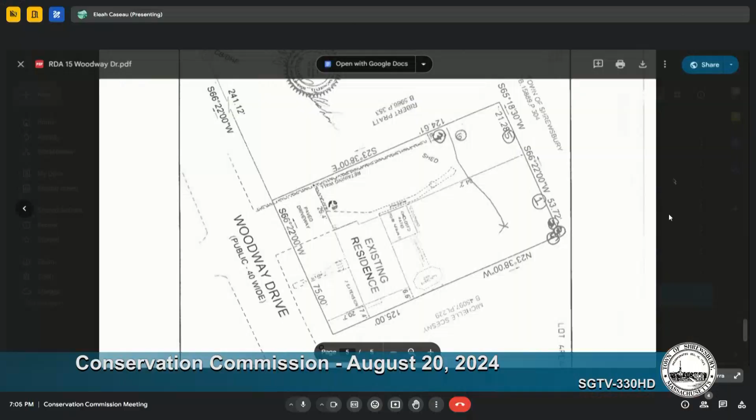Is that the one you'd like? Okay, so the tree furthest to the right - the ground below it is eroding away. So the larger the tree gets, the more weight, it's more likely to come down.

Just hate to see someone get hurt. It's on an embankment - right, it looks like a steep embankment.

And it looks like the embankment hasn't been stabilized with any plants or anything. Well, then that may be why that's such a problem. So if they do come down, you may still want to- Oh, absolutely.

We'll stabilize the embankment. Absolutely, we'll put things back there that are more useful, that is not as scary to fall on someone's house. Okay, very good.

Is that the neighbor's house in the background? I see a light area that looks like it's angled. That's not the neighbor's house, we're talking about the woods. Those woods go to the back of the house. If the neighbor's house is right here, and that tree were to fall, it would fall onto their house.

We're trying to stop someone from getting hurt and at the same time do the right thing. So I agree about the value of leaving some of the trunk for wildlife habitat. Even if the tree is dead, as it decays there will be beetles and things come in, and the wood will soften up and birds will be able to nest in there and eat the beetles. So it's great wildlife habitat.

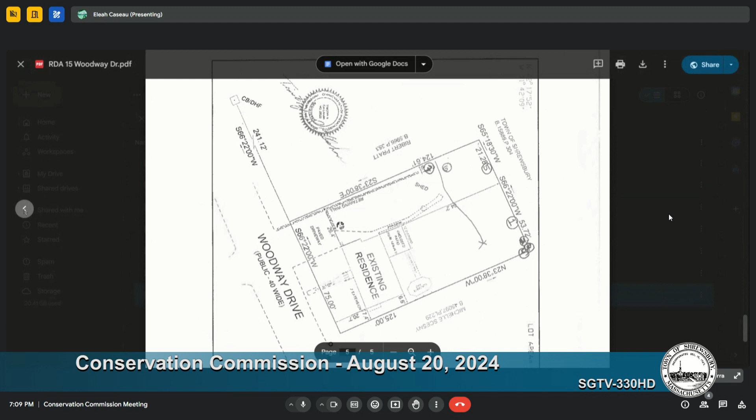And just a word about the tree that's growing like a candy cane - that may have lost limbs or had another tree fall on it, or something that deformed its growth. I think it was the vines that grew up and tied into another tree - there were these strong vines that had grown up and almost pulled it that way, so it grew that way.

Okay, I think it has bittersweet growing up it. Yeah, I was going to guess bittersweet or grape, one or the other.

Yeah, I don't have any problems with this, except for the suggestion of leaving the trunk - be happy if you can leave 8 feet of trunk, that's awesome. And stabilizing the bank afterwards.

Do you have any problem? Well, as you put it out to bid, you'll see companies that have cranes and won't even have to get into your yard, or maybe you'll find companies that can do it by hand - there are people who climb trees these days, as least invasive as possible. Yeah, okay, I'm all set.

Okay, thank you, Chris, no other questions? I don't believe I have any questions. Anybody in the audience have any questions?

Okay, would somebody like to make a motion? Mr. Chairman, I move that we issue a negative determination of applicability for the removal of 7 trees at 15 Woodway Drive, with the condition that at least 8 feet of trunk be left and the bank be stabilized with plantings.

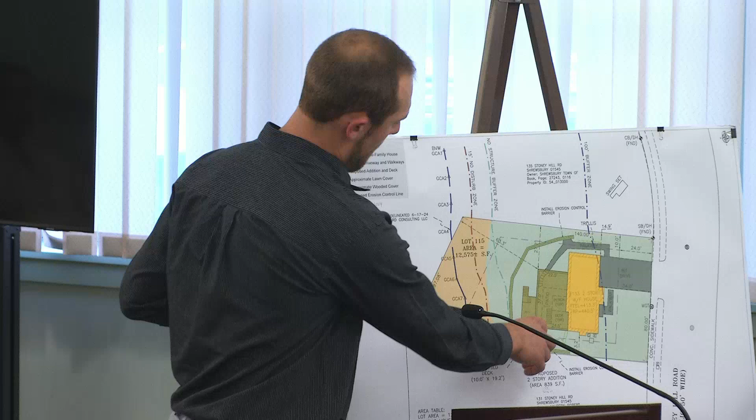So the patio, you can see in the dash line here, the surveyors created a plan that overlaid the existing versus the proposed. This here is an elevated deck, it's going to be on wood pilings with a staircase down. It's underlain by lawn, there's not going to be a new patio in this area. We're removing the patio, so the area under that deck will remain pervious.

Okay, that was going to be my question. Yes, thank you, exactly. Trying to design this in a way that is the least impactful. Okay, thank you very much.

What's the plan for dealing with rainwater on the new addition? Because it's a single-family house, it's exempt from stormwater standards, so in designing this we tried to use our best management practices in decreasing and minimizing where that footprint was created. That's why we used the 470 square foot location of the patio, and felt that a 369 square foot area over existing lawn would be essentially exempt from those standards.

And what's your plan for it? Regardless of whether you're susceptible to the standards or not, what happens to the water that falls on that new addition? Where is it going to go?

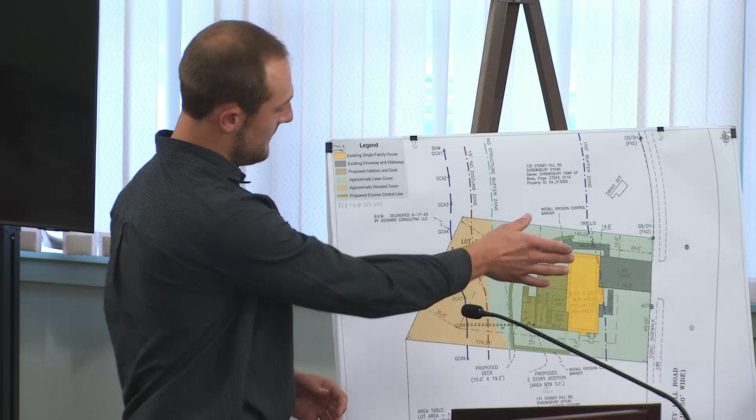The property itself generally pitches towards the rear that you see here. During construction, we had a robust erosion control plan: an 8-inch straw wattle with an entrenched silt fence, double erosion control around the entire rear of the house and existing lawn. Once constructed and stabilized, we have the full area of existing lawn, the grade is not changing, and we maintain our woodland buffer. We feel this project is not creating a significant portion of new runoff, being a very small increase in impervious surfaces, with no grading or redirection of water based on where it currently runs off the property.

Will you have gutters? Yes. Will there be a dry well? There is currently no stormwater management proposed, as they're not required to do so under the act or the bylaw.

I would make a suggestion of putting in either a dry well or a rain garden. Just a suggestion from a member of the Conservation Commission to the homeowners. Thank you.

All set. Chris? I echo Martha's comments. But also, what type of footers will the addition have, are they poured concrete? I didn't hear that mentioned. The engineers have not given us a detail on the exact design yet. I would probably be providing that ahead of construction, or that's something we can absolutely supplement for you guys.

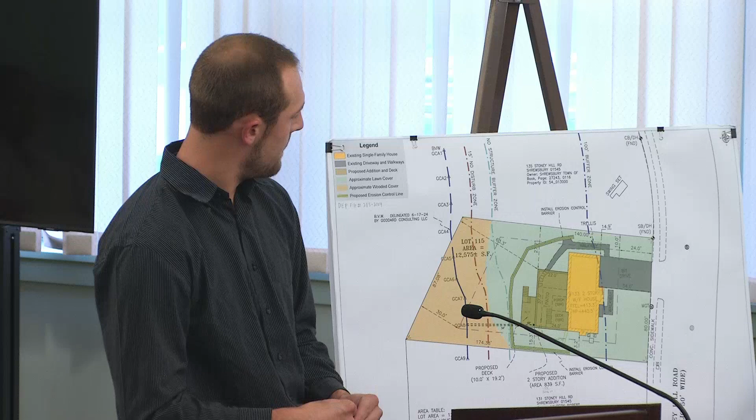And then the same would be true with the deck. Is it going to be just techno blocks, or something under a 6x6 post? That's exactly what they are, underlain by lawn.

Okay, all right, no other questions? Well, I think we really should see what type of foundation you're going to have before we approve this. I think that needs to be part of the submission. By all means, we can supplement with that information. And any extra material generated by that should be removed from the site.

I can have our engineers take a look at that and provide a bit more detail on some of the construction style, and maybe take into consideration Martha's comment about the runoff from the gutters, something to infiltrate it, maybe a small rain garden. Sure, yeah, and the homeowners are here as well, I'm happy to discuss with them after and see what we can come up with.

Okay, Alea, I don't think I have any questions. Anybody in the public have any questions?

All right, so will you ask for a continuance to our next meeting in September? Yes, we will, and we'll provide these responses by that point. Perfect, well thank you very much, we'll see you in September. Great, thank you for your time.

Okay, our next meeting, we have a public hearing regarding the abbreviated notice of intent filed by Srini Ramkumar, 31 Pal Drive, Shrewsbury, for the removal of trees and restoration of plantings at 31 Pal Drive. Sorry if I didn't do a good job with your name.

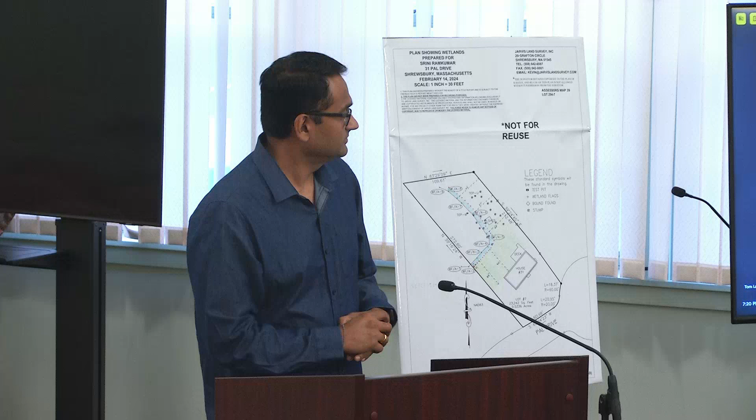I just made a brief presentation of what I am requesting the permit for. In the previous meeting, I was asked to bring a plot plan depicting what the project is, so I brought this. But before I go into this, I wanted to share the overall project at a high level.

In phase one, the plan is to remove the weeds and piled up debris—leaves, sticks, fallen branches—in the backyard, which is making it basically unusable at this moment. I don't plan to do any grading or leveling, just cleaning the piled up debris. I have some pictures to show in the next slides. Full care will be taken that there is no impact to the wetland. We'll be going with licensed landscapers after we get the permit.

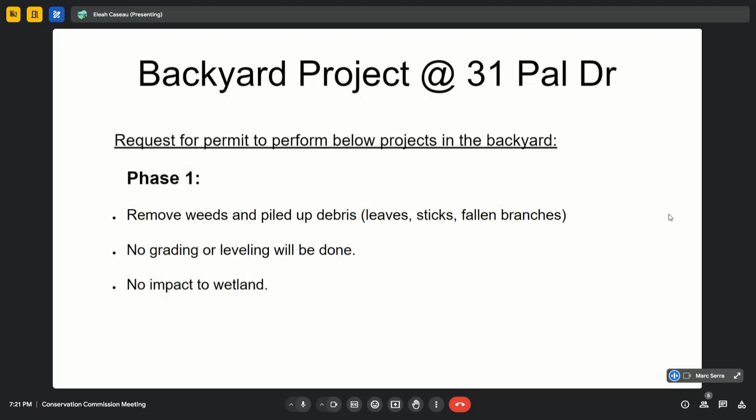So the plan is to take out these things. As you see, there's a natural grading, a natural slope, which I would be leaving untouched—there's no plan to level or make the backyard flat. I only want to take out these things and try to make it into a usable lawn.

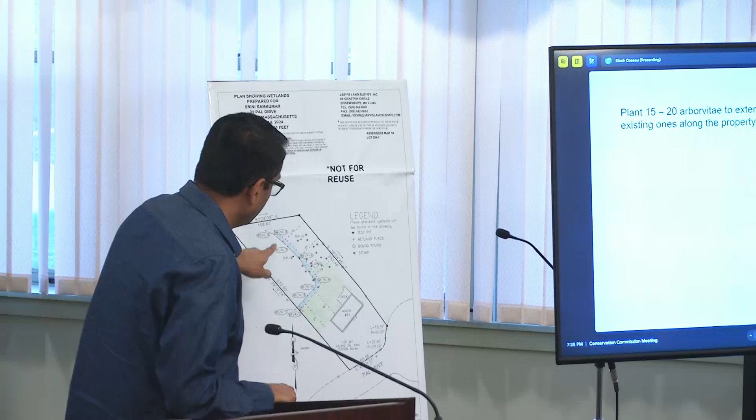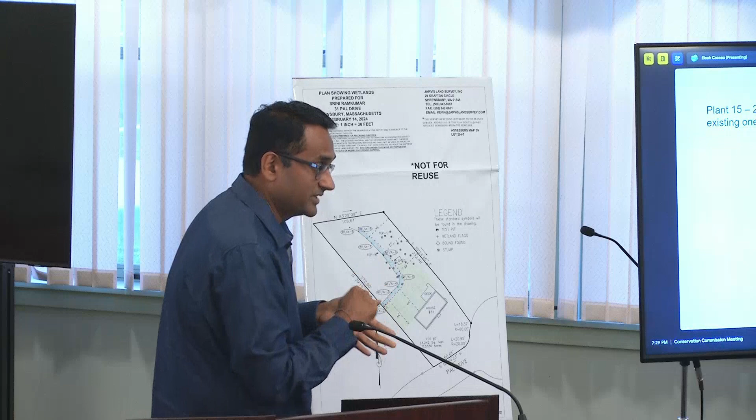And this is the plot plan. This is the house, and this is the current usable part which I highlighted in green. This is the wetland, and I'm requesting permission to plant the arborvitaes along this line. The red dot doesn't signify each arborvitae tree, it's just an indicator to separate out the wetland and the lawn, and I'm requesting that this distance is about 45 feet, 42 feet, 40, 37, 40.

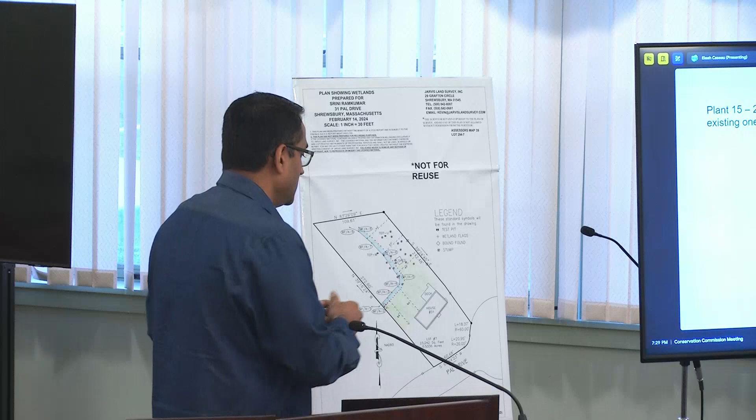So maybe I can, if it's okay, give like a 5 feet buffer between the wetland and the yard, so 5 feet towards my lawn, if I'm allowed to put the arborvitaes. Along this line I would also be planting the supplemental shrubs that would help the wetland. That's the proposal or request that I wanted to put in front of the commission.

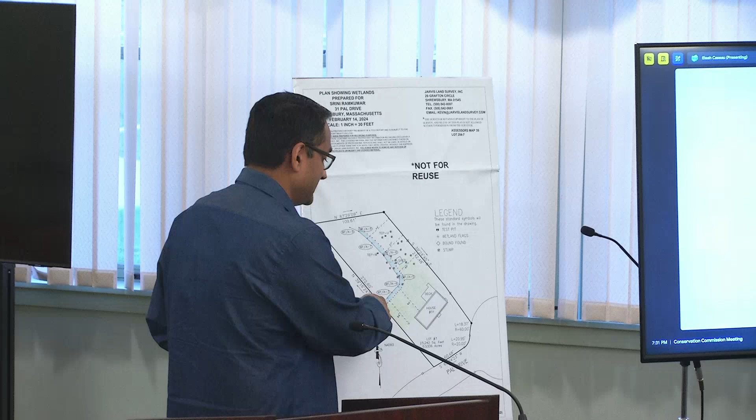I was also asking Ms. Caseau if at every stage of the project I can reach out to her so she can come over, take a look at the project, and stop me immediately if there is some corrective action needed. My concern is if I complete the entire project and then find out that in the very first phase there was some lapse I need to correct. So to avoid that, at every stage, once I complete that phase, before I start the next phase, I would request the commission or Ms. Caseau to come over to review and make sure I am following all the guidelines put forward by the committee.

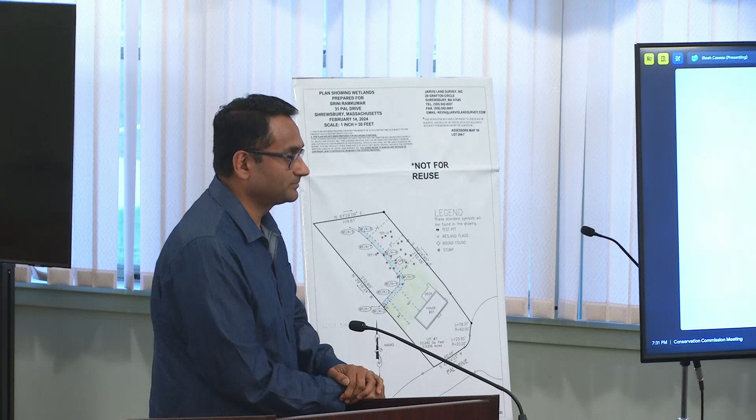So arborvitaes are great because they grow pretty quickly and can make a pretty thick hedge. Barring an ice storm or really heavy snow, they don't need a lot of maintenance as long as they make it through their first year or two. They're also not native plants, so they do provide places where birds can hide, but they provide no food at all.

Would there be an evergreen you could use that would be better than the arborvitae for that location? Cedar? Eastern red cedar or Virginia cedar, I think, is an option. May we talk amongst ourselves? Sure, absolutely. Thank you. This is not something the commission usually does.

But I was also thinking arborvitae, deer love to eat them. I don't know what the deer population is like down around Pal Drive. But they also would visually restrict your backyard view. You wouldn't be able to see out over to the wetlands anymore, so it would make your backyard seem very small.

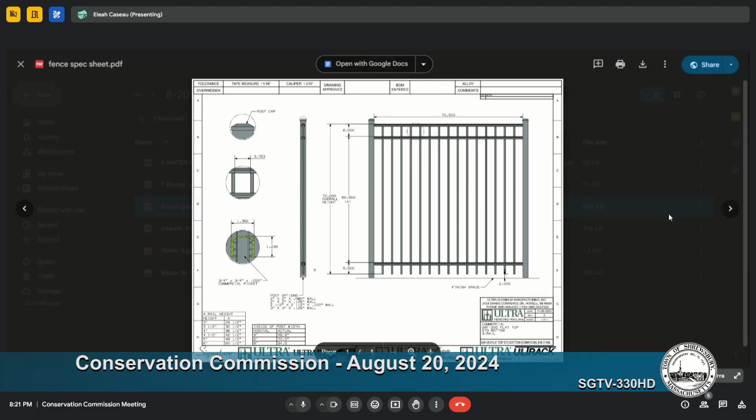So the fence specifications are in the application. I believe they're such that it would be difficult for children, at least our children's ages and their peers. We have a 1st grader and a 3rd grader, as well as older children, but the youngest ones are that age group. So they'd have to put a lot of effort in to get through, but that doesn't mean we'd leave them unsupervised.

The other reason for the fence is that we have dogs. We honestly haven't been able to use our yard at all for the dogs. The neighbors allow their dogs free reign of the yard, but we haven't been able to put our dogs out there because the neighbors have been fairly forward about not wanting our dogs near the waterfront area.

One of our dogs at a previous residence had gotten out a lot, so the town actually asked us to put in a fence when we moved into this house so the dog couldn't escape. So part of the motivation is having a fence in a location the dogs can't get out from easily. If it's set back 5 feet, then the minute the children open the gate, the dogs can go right through into our neighbors' yards.

Neither of our dogs enjoy swimming, although they've only been to the water once. But because of the way the bulkhead is, the gate would only open onto our own dock. It wouldn't keep us from needing to watch our pets, but it would keep them from moving into the neighbors' yards easily or readily.

I think the neighbor to our left specifically asked us to build a fence all the way to the water. They weren't here last time, but they would like the fence to be there.

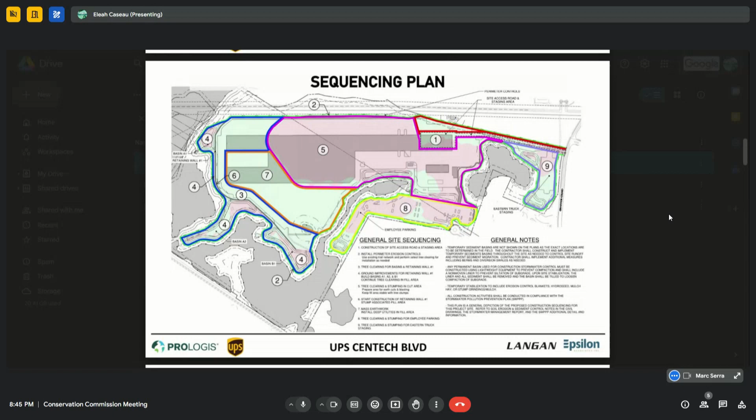So I'll go through this briefly here. As you can see, we do have the numbers on here that correlate to notes that will show up on the plan, which will be a little more clear. But the first thing the contractor will need to do, obviously, is cut in a construction access road, shown here as number 1. So they'll be just cutting in a small access point, constructing that out of gravel, stabilized material with a stone tracking pad, just so they can get their equipment in there and start to stage.

Second thing will be to install the perimeter controls around the entire downstream perimeter, which would be a wire-backed silt fence with some filter tube socks as well. We're fairly confident that we can use the existing trail network throughout the site in order to do that, so we'll have limited tree clearing needed to install our perimeter controls, which is great.

Number 3 would be to start clearing some trees in the southern area in order to start building our temporary stormwater basins. Number 4 would be ground improvements for our retaining wall.

So in the southern area, plan south is to the left, if you recall. We've kind of twisted our view here, so plan left is south. Start to build, there's a fairly large retaining wall here. We'll start to build the retaining wall and the basins as well, the temporary sedimentation basins.

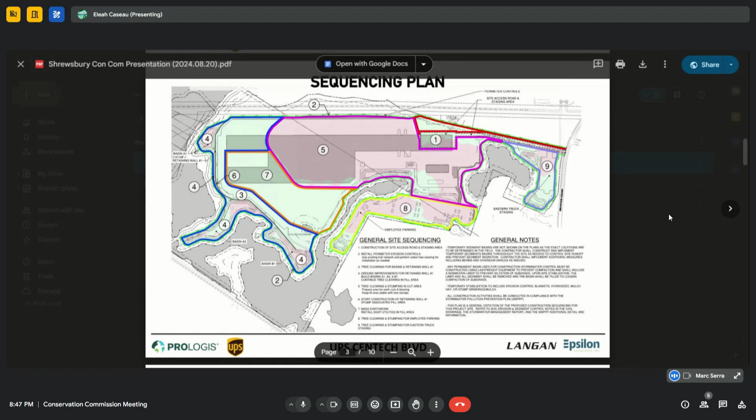Number 5 will be starting some of the tree clearing in the large cut area. The pink shading represents where we have cut earthwork, and the green is where we are filling. So we'll start to clear some of those trees to start our excavation so that we can have material to push to the south to start filling that area.

After that, number 6 will be to continue our retaining wall construction, filling in the reinforced area and starting to bring that up to grade. Number 7 will then be to start filling in some of the deep fill areas.

So we'll try to leave this area designated as number 7.

Sorry, my computer died. Let me see if Marc has a charger. No problem. I think Hannah's logged in here, so she can probably share screens, and we can keep going. Perfect, okay. All right, I'll run upstairs and grab my charger while you continue sharing the screen. Just get back to where we were.

All right, great. Can I ask one question? Yes. So as you're sequencing this and building up your fills, are you also stabilizing the fills and slopes as you're going? Yes, they'll be stabilized as we're going up. Any slopes that are exposed will receive jute netting and hydroseed as they're built. We don't have any slopes greater than a 3-to-1 on site, so that's good, that's fairly easy to stabilize.

The large fill area in the south here will be bounded by this retaining wall, so there won't be a slope there, right? It'll just be the retaining wall coming up. And that reinforced backfill will be a fairly granular material with low silt content, so there should be low potential for silty runoff in that area.

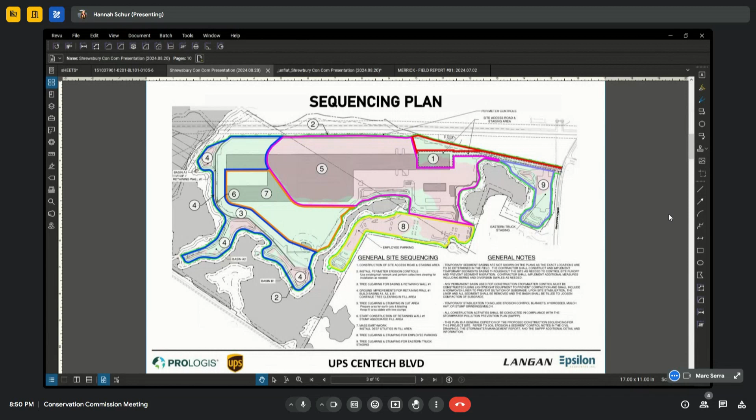So on the next slide, it's just a profile of the site to show again: the red is the cut excavation area where the green is the deep fill. How we need to clear trees strategically, cut to fill strategically, so that we can kind of push the material from plan right to left, essentially.

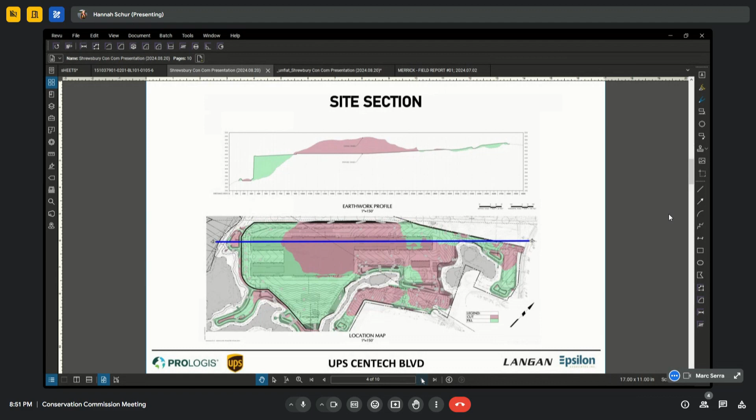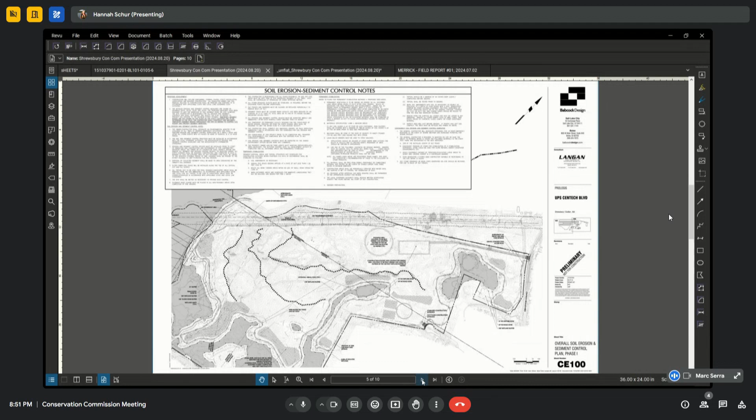Okay, next slide. And that'll all be done in conjunction with our sedimentation and erosion control plans, which were submitted in the original package as well, just shown here again for a bit of a reminder. We'll have intermittent rows of silt socks and filter tubes, there'll be temporary seeding and using straw cover, things like that along the way, all subject to our SWPPP plan that will be developed and implemented.

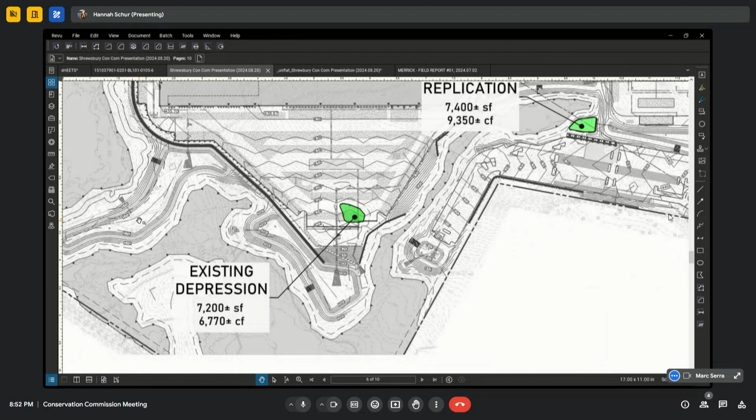The main point being that it is a small bylaw ILSF in Grafton. We were replicating the volume, and after some discussion with the Grafton Conservation Commission, we thought it'd be better not to propose that in one of the stormwater basins.

And the location that we settled on as being the ideal spot for it is shown there, plan right, where we show the proposed replication area. As you can hopefully see there, it does straddle the town line, so a piece of that will be in Shrewsbury.

Essentially, one of our detention basins just to the right of that receives water just from roof runoff, so it's clean water running off into that basin. It's a detention basin, not an infiltration basin.

It'll be controlled, slow, and released slowly through an outlet control structure, and the outlet will feed that isolated wetland replication area. We have some details showing how the inlet works - we're not going to have a typical flared end section inlet. We'll have a large T essentially on the end of the pipe.

It'll be, I think, a 50-foot long perforated pipe. So the water will essentially just kind of leach out of that. So you won't have a point discharge, so we're not creating any erosion issues in the replication area.

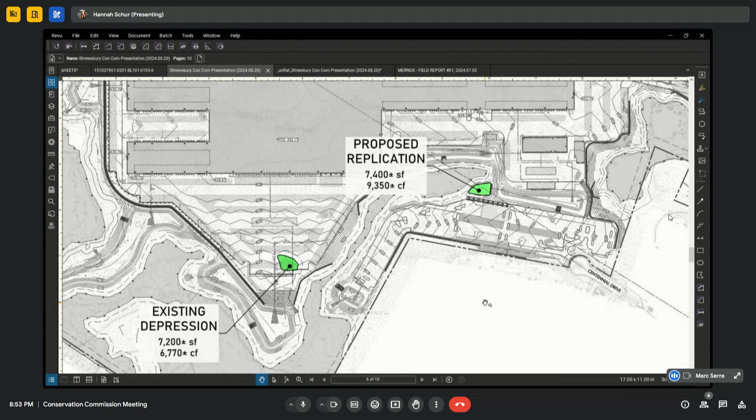And there'll be an overflow on the southern side that will discharge into the bordering vegetated wetland there.

So is that replication connected to the wetland that's right next to it? It's not going to be connected because the wetland that we're filling is isolated - it's an isolated land subject to flooding. It's under the state regulation, it's not even close. Grafton has a more stringent calculation, so it's a bylaw ILSF.

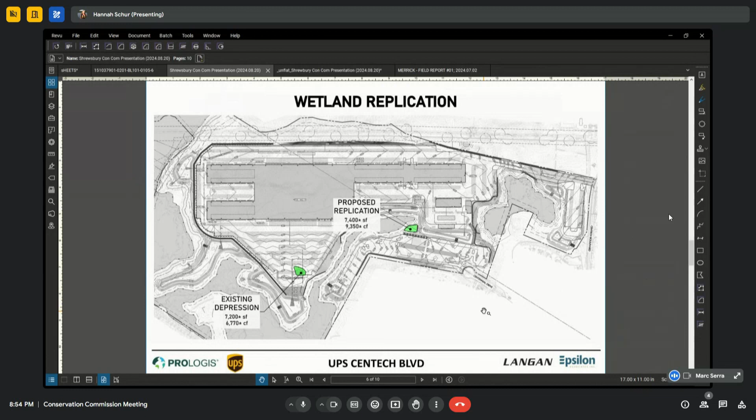So one of the main points is to replicate the volume. But it is not connected to a BVW, and we don't want to connect it to a BVW because we want to replicate it as it currently exists, essentially.

Does that replication fall within our bylaw conditions? Do you know? I don't know if we require replication for isolated land subject to flooding or bordering land subject to flooding.

One question that would arise is, if it's crossing that line and it's technically a Shrewsbury isolated land subject to flooding, does it count towards Grafton? Will Grafton accept that? Yeah, we've presented it to Grafton Conservation already, and they're okay with it.

Okay. Yep. Because that would be the big thing if you just don't reach your number. And we love a little extra isolated land subject to flooding, but if it's not benefiting your calculations, then it's just land. Yep.

Okay, next. So a comment we received from DEP was that we calculate, that we look at the wetland series M, that is an isolated wetland, is a fairly large isolated wetland, and we run the calculations to determine if it's an isolated land subject to flooding or not, and we always assumed that it was, just because it is a fairly large isolated area. It does have about a 10-acre watershed that flows to that isolated point.

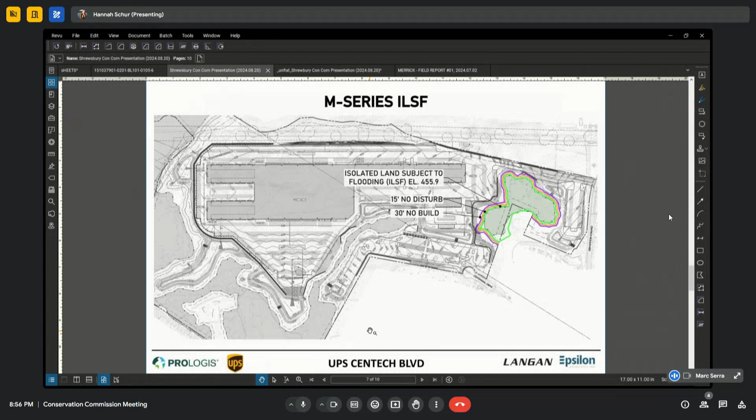So we have gone ahead and run those calculations, and lo and behold, yes, it is an isolated land subject to flooding. We have determined the actual boundary of the isolated land subject to flooding, which follows the elevation, the contour, which generally falls either within or on top of the delineated wetland line, except for a couple of areas. One specifically is on the southern area.

Hannah, if you want to zoom in there, kind of on the southern, along the property line, it kind of comes out of the wetland area, but it's off of our property, so we're not that concerned with that. And then there is a little bit of undulation with the contour on the left-hand side there.

So that ILSF boundary does kind of come out of that wetland area. So we have actually adjusted our buffer zones on the plans to account for that, to use the more conservative of the two, coming off of offsetting either the wetland line or the ILSF line, whichever one is more conservative.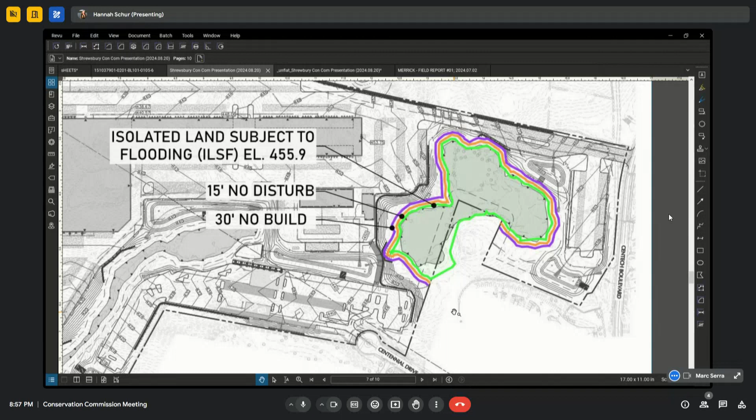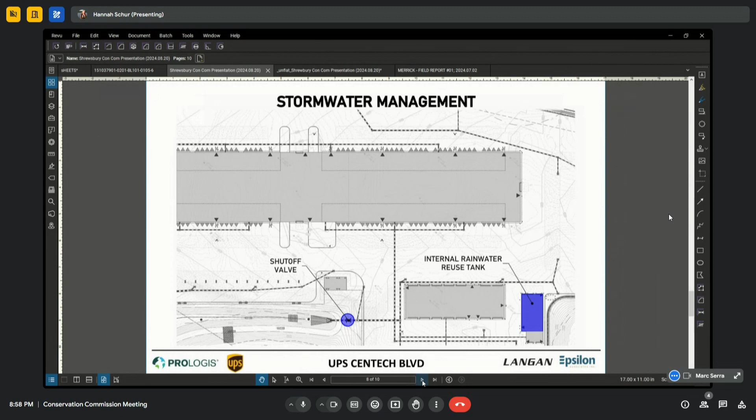Last time we presented, we had conceptually designed some pervious asphalt areas, looking at ways to add low impact development designs to the employee parking lot specifically. We had shown conceptual locations for the pervious asphalt. At that point, we were considering putting the pervious asphalt in the low points of the parking lot, essentially using it as drainage conveyance in lieu of catch basins.

But the site is considered land use with higher potential pollutant loading under the stormwater bylaws and manual, and we need to achieve pre-treatment before we discharge stormwater to an infiltration basin or infiltration BMP. So we were scratching our heads on how we were going to do that with pervious asphalt. We actually had a call with Graves Engineering, since they would need to review the plan we submit, and talked it through with them.

What we came up with was, rather than putting the pervious asphalt in the low points, let's put the pervious asphalt in the high points. That way, the rainwater essentially rains directly into the pervious asphalt, and you're not getting that first flush across the standard asphalt into the pervious pavement.

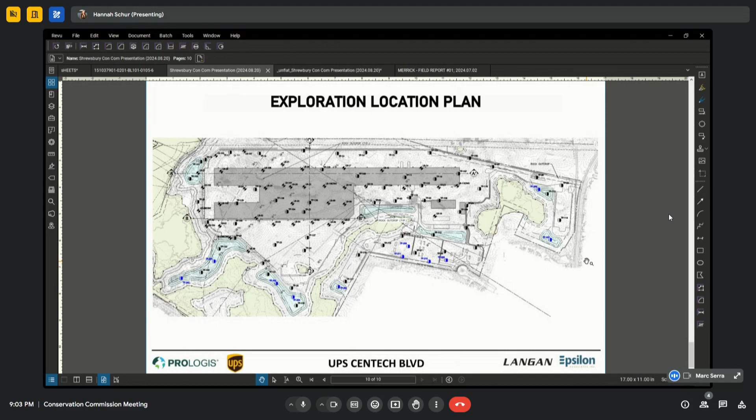So we went back out and spent a few days in the field. We performed an additional 11 test pits to get better soil testing coverage throughout all of our stormwater BMPs. At this point, we've done about 100 borings and test pits on site. We have, in my opinion, really good coverage—we understand the site, soil conditions, and groundwater elevations very well, and we have a solid plan for our stormwater system.

We've just today formally responded to all of DEP's comments in writing, and forwarded that to Alita earlier today. We're also working towards, and just on the verge of, submitting some revisions and updates to Graves Engineering as well. They had given us, through the planning board, a comment letter with very minor items to address from a stormwater standpoint, which we have addressed, and we're just updating them on these items we've presented tonight, which are just changes essentially.

So that's what we have for you tonight. We will again be submitting all this, have submitted electronically. Everything I mentioned, will be providing hard copies this week. I believe we'll be back before you in September, at which point I think we've addressed your comments and questions, but at this point have addressed everything we've discussed so far. So hopefully at that point in September we can start to talk about an order of conditions. Okay, thank you. Thank you.

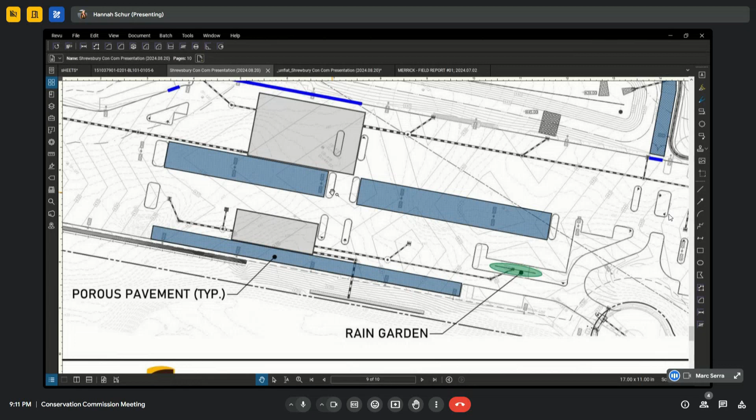And as someone mentioned earlier, if you do plow the pervious asphalt, if you get a little sunlight that starts to dry it out, the water starts to melt and just percolate downward. We had talked about putting up some signage where we can, to let the plow drivers know those areas are pervious pavement. I'm sure the owner would be amenable to making sure their plow folks are trained on that.

And then are those little ovals within the parking lot going to be vegetated buffers for the parking lot as well? Yes, I understand one is the rain garden, but the rest will just be raised islands with lawn and grass. They'll have some trees in there. Okay, trees and mulch.

And then, what would be the sequence of installing the pervious pavement? Because there can sometimes be a disconnect between the engineer and the contractor who's actually doing the work. So I just want to make sure that doesn't occur, that this area is specifically for pervious pavement and it doesn't accidentally just get paved. Well, if that happens, then we'll have to remove it and tear it all up.

Okay, cool. I just wanted to mention we've had communication issues in the past where the engineer says, yeah sure, no problem, pervious pavement it is, let's do that, and then it doesn't happen, and it's annoying to track you down after. Yeah, I understand. No, we'll make sure it happens.

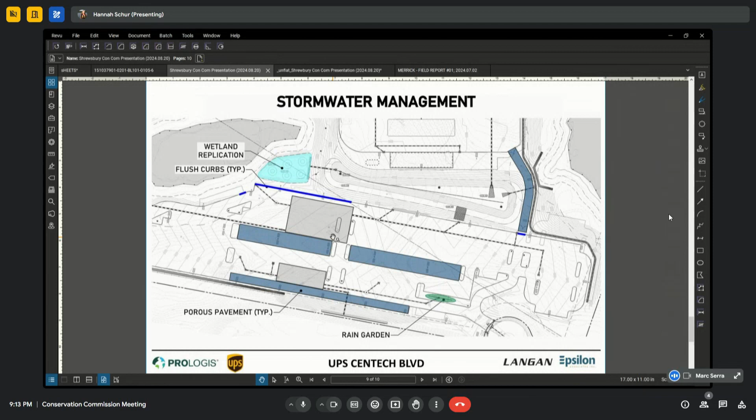Okay, going back to snow storage locations we've looked at in the past. I'm concerned since the area adjacent to the replicated ILSF and the isolated wetland, the M series one, are low areas where snow tends to be deposited. Is that a proposed area for snow storage? Because we don't want that to just trickle right into the wetlands, or is it proposed to just try to get all that snow away from there?

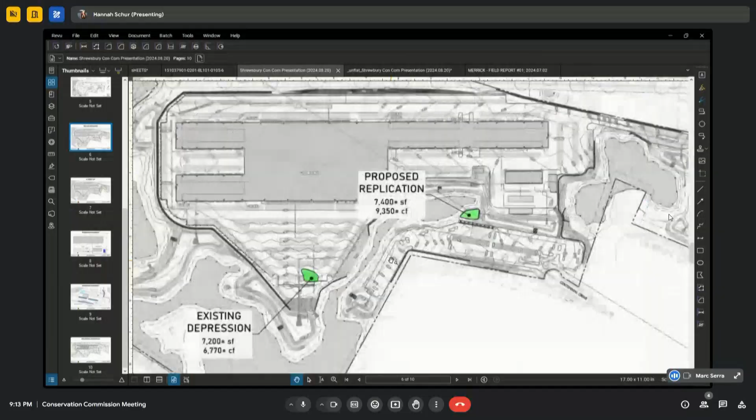The designated snow storage for the employee parking lot will likely be towards... is there a sheet that zooms out, even the test pit plan is fine. Yeah, there you go. It's more towards that area, that kind of overflow lot sort of area. Exactly, because the majority of the employees are going to want to park closer to the walkway, so if they need to use those spots for snow storage.

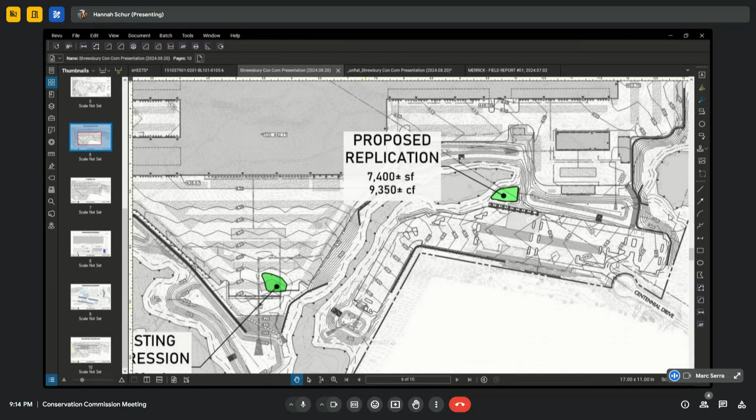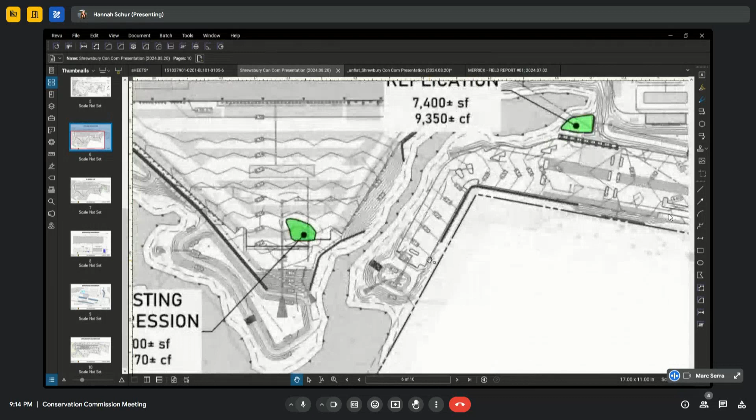And then will it be the low area on the south - is this north, south? Let's call that south, plan south I guess. Is that where the snow will be deposited, on the southeast side of that? Yeah, there's a space between the edge of the parking lot and the small basin there, for some snow storage.

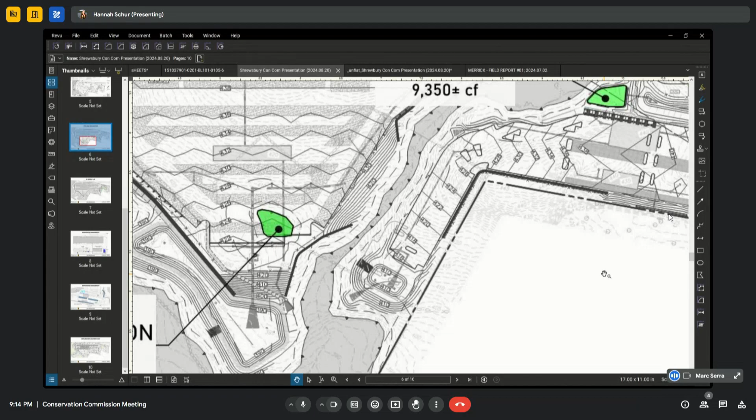And if they need to truck it off-site or truck it back into the warehouse area, something like that, they'll have to do that. Yeah, I just want to make sure it's avoiding those parking areas most adjacent to the wetland, because in creating that lovely little wildlife corridor, you also create no curb to stop that snow from just running right into the ILSF and the IVW. Yep, okay.

I think that's all my questions. Anybody in the audience have any questions? Anybody on the board? I just have one comment.

I imagine you were severely constrained to put that replication area crossing the town borders. It's not that we didn't want to have it crossing the town border. It actually ended up being what we thought would be the best spot for it, because with any wetland replication area, you want to make sure that it's fed hydraulically. And this just happened to be a nice place where we had some room. Obviously, we are constrained with space on site, and we don't want to encroach in any wetland buffers or any tree clearing area that we don't need to take down.

It ended up being just a good spot where it's about the same size, a little larger than what we're replicating, and just an added bonus right near our detention basin that will have a fairly steady stream of even low flow events. Low flow events in our infiltration areas, it's just going to go into the ground. The detention basin, you'll get some flow trickling through, and it's also roof runoff, so we're not concerned about suspended solids and things like that getting in there. So it kind of just worked out nicely, I think.